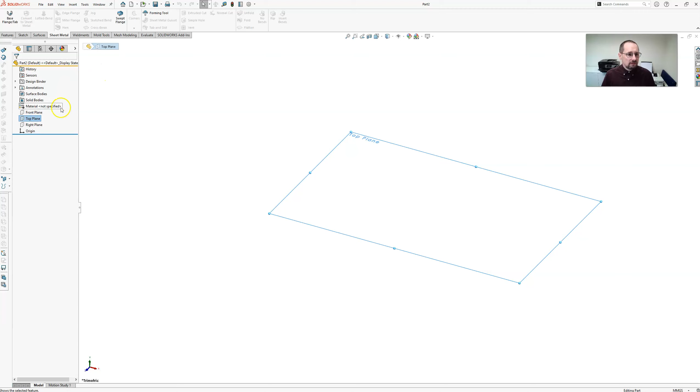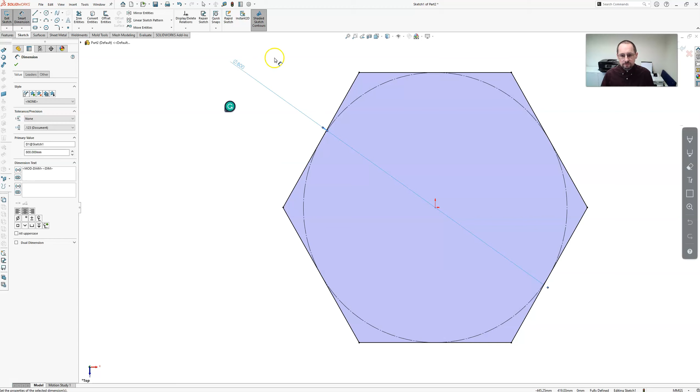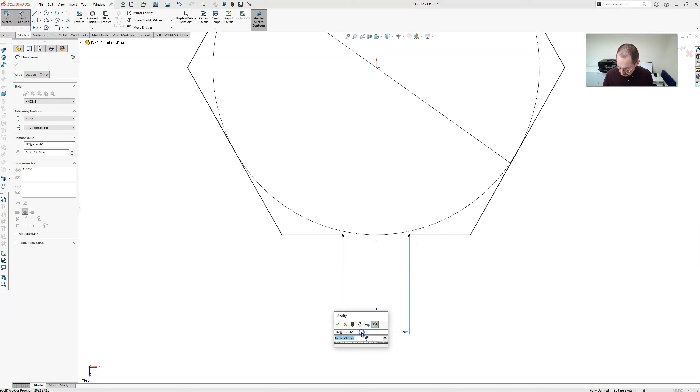We'll start on the top plane and we'll do a sketch. Hexagon. And we'll get a diameter, 800 now. We'll have a little join in the middle, so we'll just trim away the bottom there, so a small gap there.

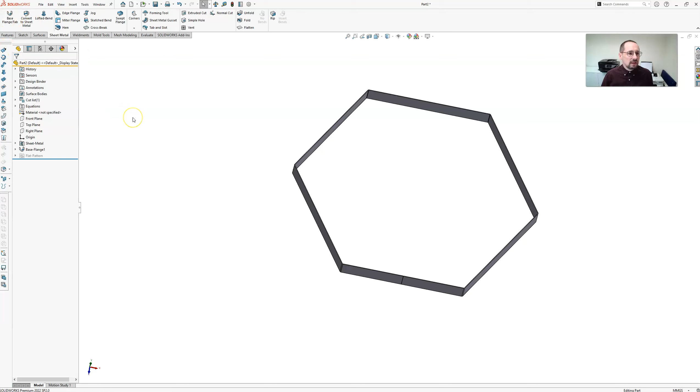We'll extrude that with the base flange, 50 mm. Come along nicely, and the top and bottom parts will become one feature. If we use an edge flange, there it is.

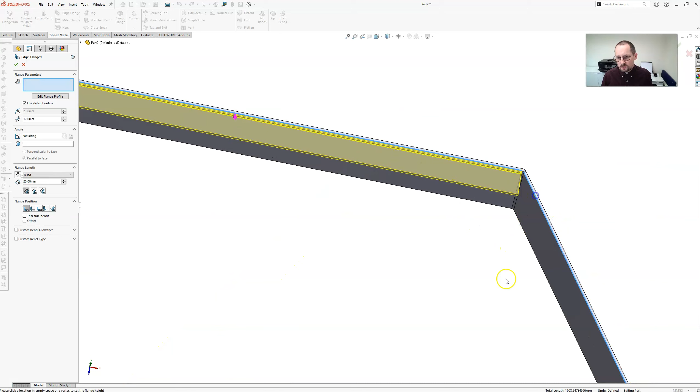Click on this edge, we'll drag it out here, and we'll say it's going to be 25 mm long. And we'll click all these edges in turn, and as you can see, it automatically miters the edges for us, the corners. And of course, we can do the other side as well.

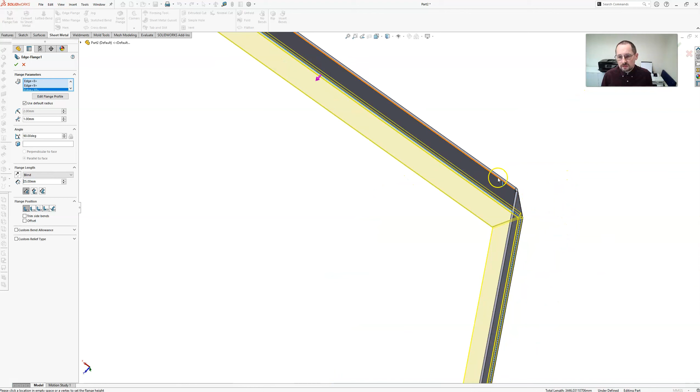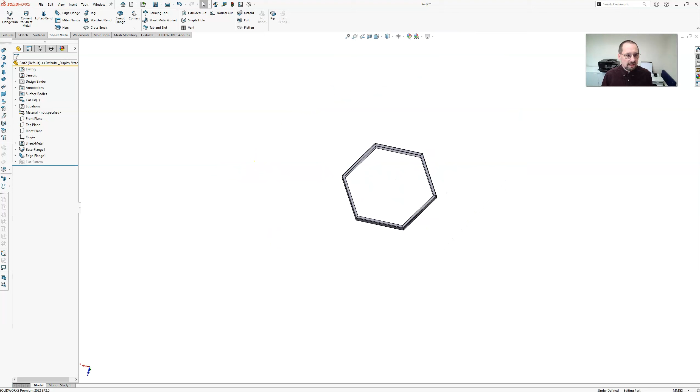I just thought this was a really neat way to create relatively complex geometry really quickly. There we have it, 2.5 minutes. And we have a flat pattern as well. There we go. Nice and quick, nice and easy.